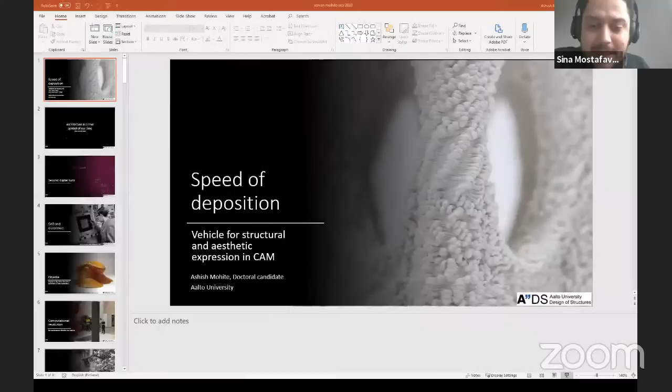Thank you for inviting me for this talk. I'm sorry, I'm having some trouble here. You guys hear me? Yes. Okay, so I'll start with my talk.

This is a few years of my work from my PhD. I'm almost finished with my PhD, I have to submit my thesis now. So the topic of my PhD is about speed of deposition, a vehicle for structural and aesthetic expression in CAM.

This presentation is divided into two parts. The first part is about the theoretical background, what I'm trying to do. And the second part is actually the practical examples, the experiments which I did.

Architecture is a true symbol of our time, architecture has a very close relationship with technology. But as you know, in the second digital turn, Mario Carpo argues that architecture is always lagging behind the technology. And now when we started the first introduction of CAD in architecture, there was this disconnect between what we do, like the maker, and what the building is built, because we are designing it on a screen, and actually the building is built by the drawings.

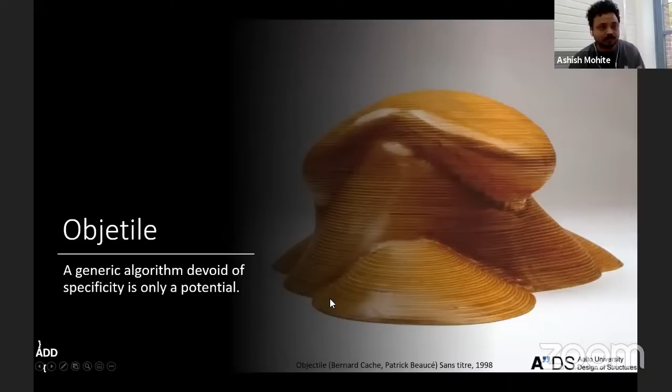And then in the early 90s, when the experiment started in computer aided manufacturing, there was this experimentation which was Objetile, where the generic algorithm was devoid of the specificity, but it had the potential. And this is where all the thinking started, how digital fabrication can be used as a process in the design, and how it would influence the way we build.

And now we are having this computational revolution where, as you know, there's no gap between the thinking and making. So the thinker is also the maker. And then we can dive into the topic of digital craft again. We are now this kind of digital designers and makers.

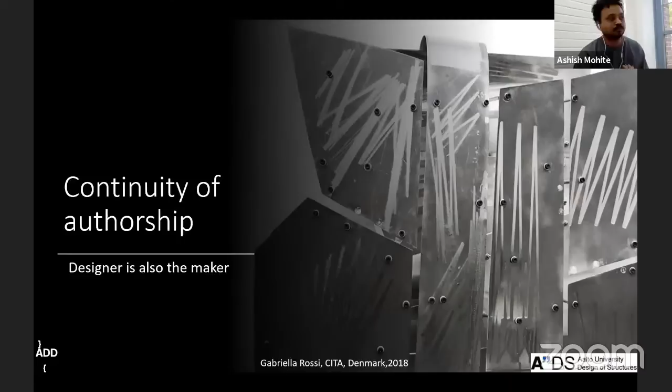This gap is narrowing. As you know, architecture was always - we were making drawings always, we are not actually building. But now with digital fabrication, we can actually also build and create this kind of notations, which are the code. And in order to have this kind of digital craftsmanship in architecture, what I believe we need is two things - one is this kind of continuity of the authorship.

So the designer is also the maker, and the object itself is a process model. What I believe strongly and like to argue is that we are no longer designing the form that will be ultimately produced, but we are designing the process. I'm interested in this process of making with the digital fabrication tool, and what comes out of the process because of the material, because of the tacit knowledge.

But then there also lies a risk of control. There is this risky craft of digital making, which Branko Kolarevic also quite rightly said is inseparable from the notions of glitch, errors, and unexpected results. So you have to be very careful about what kind of control you want and what kind of lack of control you want. This leads to the surface variations I'm interested in, what I call this rebirth of ornament, which comes from the process and from the materiality.

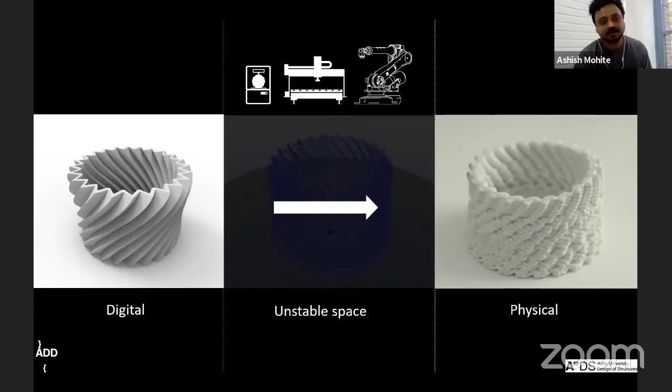So all the experiments started from one accident I had back in 2014. There was this digital model, I built this ceramic printer, and then I printed that digital model, and the result was completely different than the digital model. I was interested in what actually happened, what is this unstable space in between the making and the material which produced this form, which I never designed. So this form actually came from the process.

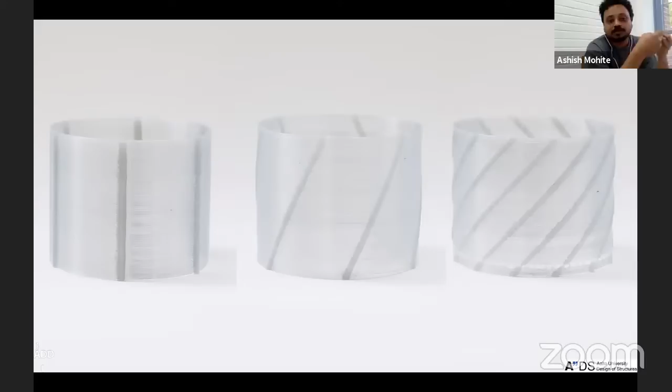So I started experimenting. First I started 3D printing with plastic, and the only parameter I changed is the speed. For all the examples I'm going to show, mostly cylinders, and all I change in the code is how the printer moves. When the printer slows down, it deposits more material; when it moves faster, it deposits less material. And I try to observe what kind of surface artifacts are created from that.

As you can see, the surface artifacts start to happen from the process of the printer moving. All of this is not designed, it comes from the process. Then I start changing the parameters more, changing certain rotations, changing the speed more and testing more. Again, the original objects are just cylinders, and all I change is the speed at which the printer moves and the amount of material deposited at certain points. Just from the movement of the printer and the material, in this case plastic, you start getting these surface artifacts which are undesignable, coming out of the process, these textures which are coming out of the process.

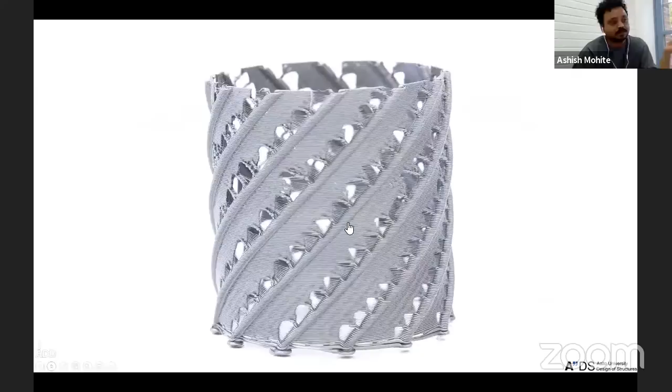When I wanted to make some holes, I again started changing those parameters, and because of stringing in plastic, I started getting this kind of holes. So again, remember it's always just a cylinder form, and I'm changing the speed at which the printer moves.

Then I moved to another material. I wanted to see how the material has an effect on the output. These are the same kind of results from a different material. In the first case it was plastic, and in this case it was ceramic. As you can see, ceramic, because of the viscosity of the material, the ductility of the material, and the effect of gravity on the material, gives different results than plastic.

And I start comparing those results now. Here, side by side, is the same kind of code for plastic, and the same kind of code for ceramic. You can already see what different results I'm getting out of that.

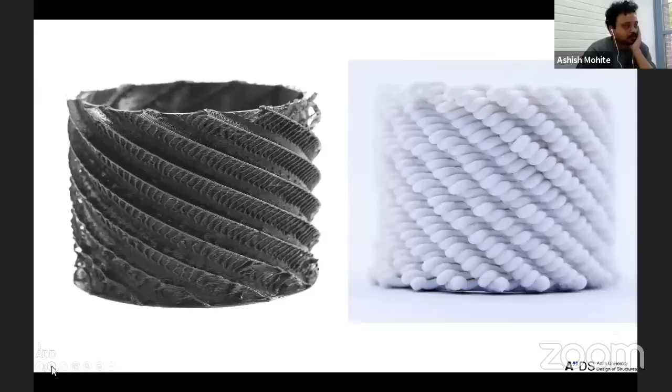So then what kind of architectural implications this brings was always the question in the background. I started also experimenting with metal welding, 3D printing by welding robot, and I did the same experiments again. Now I'm comparing three materials, how the materiality actually affects the object. Here, again, I'm just designing the process, and trying to see how the materiality and the movement of the printer actually affect the outcome.

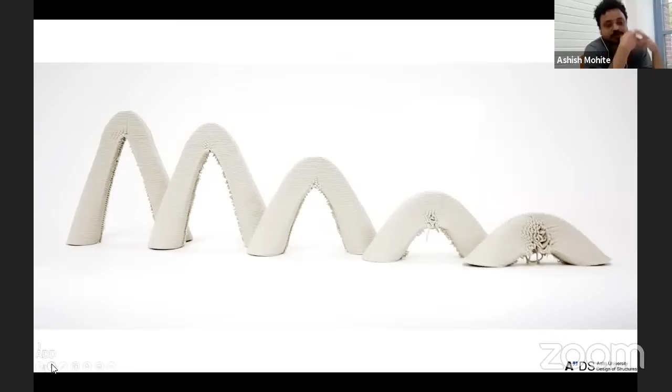Now, in order to check what would be the architectural implication and the mention of ornament I mentioned before, I did a series of arches and checked where the arch actually starts to fail.

I wanted to apply my effects of the speed of deposition to that and see what comes out of it. This is the first experiment, without my effects, where you can see the arch failing.

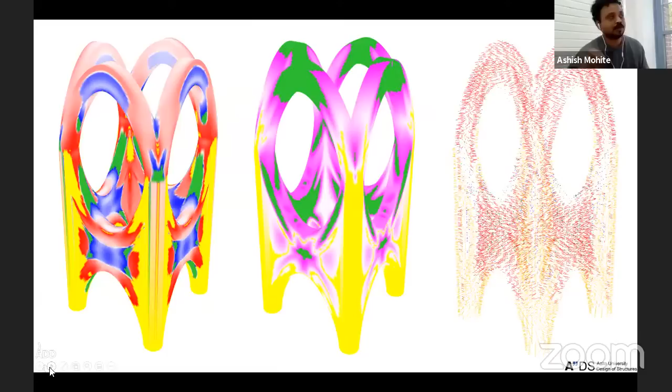I did a Karamba structural analysis, which told me where I should add more material - meaning where to slow the printer down and where to make it move faster. This was the result: next to each other, this is the model without the effect, and this is the model with the effect of speed of deposition.

In this case, the speed of deposition textural effects start to become ornamental. Why ornamental? Because if you remove the ornament, the object fails. This gets at the notion found in Gothic architecture, where ornament is actually structural - without the ornament, the structure fails.

This was another experiment where the structure is failing - the arches are moving in one direction. Because of this deposition of material, the arches become stable.

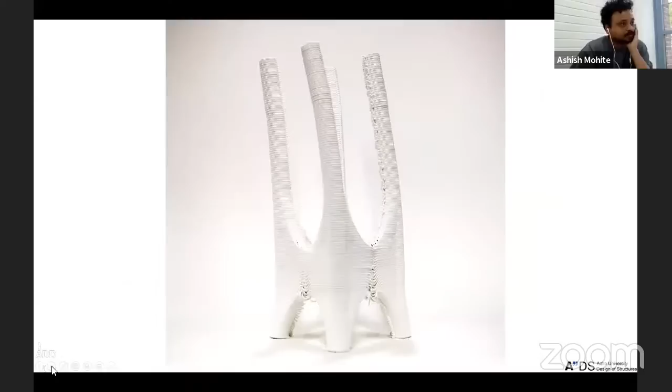Another experiment involved four tall columns, which were also moving in one direction because of the load. With the speed of deposition applied, they become stable.

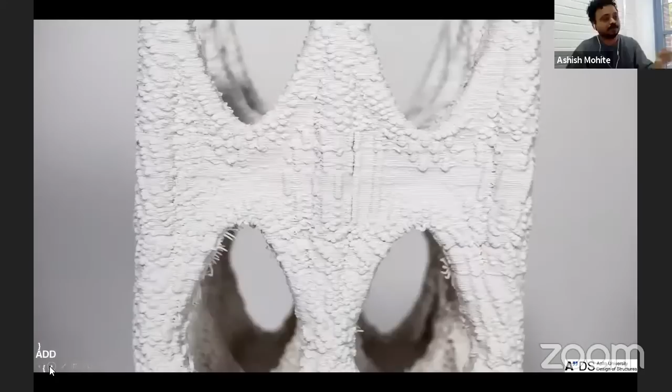Then I wanted to scale it up and make a large scale prototype. As you can see at the bottom, there's more mass and more material because that's where more mass is needed. As you move up, the speed goes faster, meaning the printer deposits less material, and you can print a stable structure.

So the next question is how do you scale this up to architecture? I remember from Neil's lecture, he had this King Kong example where it's not that easy to scale a small prototype into a real architectural-scale prototype.

That's when I also started this concrete 3D printing company, Hyperion Robotics. Now the idea is that once my PhD is over, I'll take these experiments to the larger scale of architecture, and try to apply what I learned from the speed of deposition to see what kind of surface texture and ornamental implications it has.

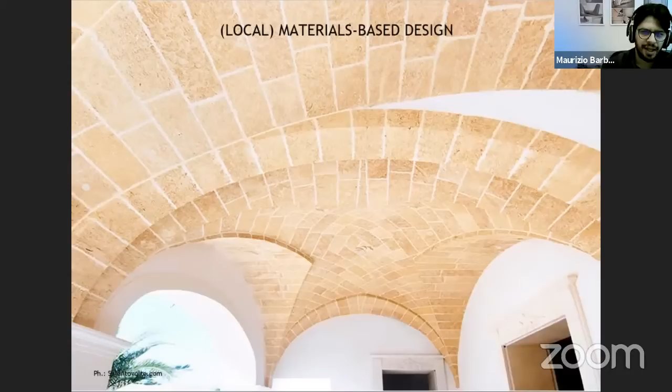This is important in order to preserve and evolve the history of local identities. I like to start from history when I design something. This is particularly true for stone architecture because it has centuries of history behind it and a huge heritage that constitutes some of the best architectural examples of the past, obviously where the stone is available.

For example, this is a volta stellata, which is a starred vault - that's the translation from Italian to English. It is a typical vaulted system from the south of Puglia, built in situ with few supports and without the use of a falsework.

I'll stop talking about Puglia because I want to talk about the evolution of fabrication techniques from tradition to robotic. For sure, stone is an ancient material, but its use has evolved over the centuries to embrace the digital revolution, and in the last few years, the use of robots as well.

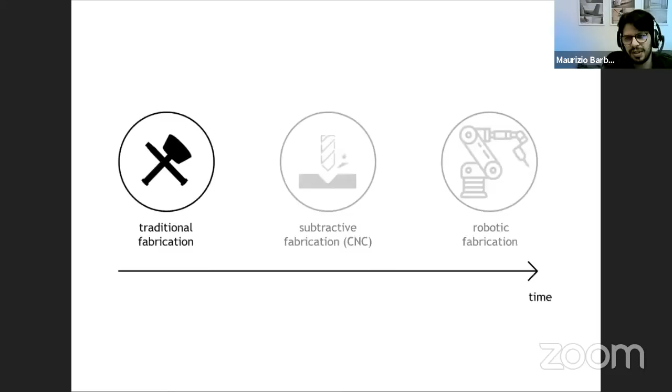The first phase of this evolution is the traditional era, which has lasted several centuries, as you know. Among all the traditional construction techniques using stone, there is one which is particularly interesting for us: stereotomy. It's a strange word, but stereotomy comes from the Greek and indicates the art of cutting solids, and it is historically related both to timber and mostly to stone.

Stereotomy is particularly useful when the complexity of the geometry to be constructed needs very well-controlled design of the constituent parts of the vaults, starting from the design phase. So it's not only a design tool, but a way of starting to imagine a new type of architecture.

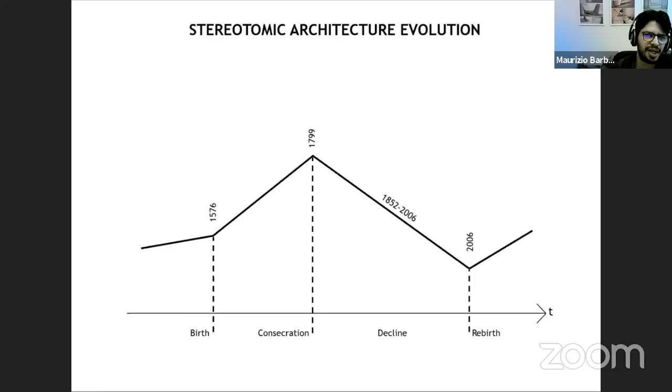And despite its utility in creating such amazing vaulted spaces, from the second half of the 19th century we see the progressive disappearance of the art of stereotomy from the architectural scene. This happened mainly due to the introduction of artificial materials and the consequent development of construction techniques and design methodologies appropriate to their use.

But the event that changed the recent history of design is the so-called digital turn, which gave the ideal condition to overcome the modern versus postmodern contraposition. The massive diffusion of computers for design completely changed the reference paradigms of the discipline, finally allowing for the development of new architectural languages deriving from new design methods.

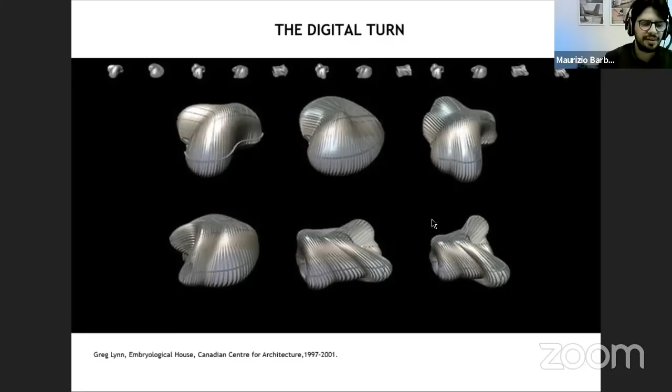I think it is also important to update some old techniques like stereotomy. Of course, the realization of this new architecture is allowed by digital fabrication. Starting from the 2000s, architects understood that the information in the digital 3D model could be used directly for manufacturing and construction purposes, thanks to the use of CNC machines and other tools.

Anyway, the introduction of digital technology in the stone industry is therefore the result of a long evolutionary process rather than a real revolution, unlike in other sectors of architecture and fabrication. This has allowed us to maintain a series of technical and practical know-how deriving from a long secular tradition, which then merged with the innovation brought by digital technology.

As an architect and designer, I started to think about how to take advantage of these tools and find a way to express their potential to update the stone sector.

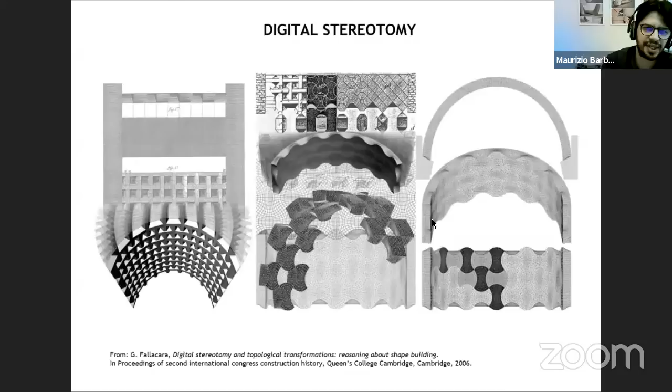In the same period, the introduction of digital technologies led to the development of digital stereotomy, which is the main sector in which I worked, and which is an update of the discipline made possible by the spread of parametric modeling and CAD/CAM fabrication systems. Today, in the scientific literature, the term stereotomy is used in a broader sense because it has partly lost its traditional association with stone architecture, approaching the literal definition - the science of cutting solids - without any reference to a specific material. This is what I've called, with my supervisor Giuseppe Fallacara, Stereotomy 2.0.

With him, I've co-edited an entire volume of the Nexus Network Journal about stereotomy 2.0, which included an unfinished manifesto, just to stimulate the discussion on this topic.

In this text, we stated that stereotomy 2.0 is closely related to the use of digital design and manufacturing tools like robotic arms. We also stated that in stereotomy 2.0, we should investigate the unexpressed possibilities of the discipline and overcome the limitations imposed by individual materials, like using just stone without the aid of other materials, for example by using composite materials born from the union of materials with different characteristics.

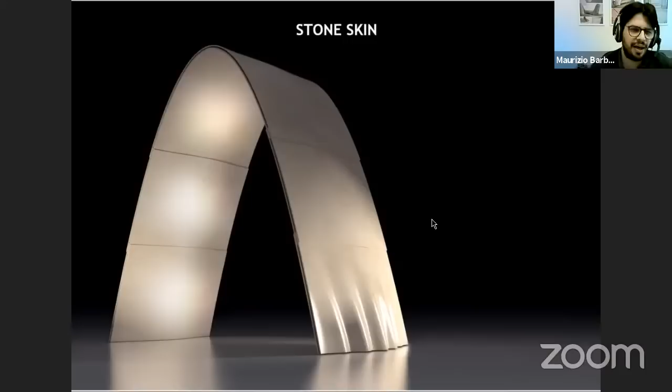I'm very lucky in the last years to collaborate with companies and other designers in the realization of several prototypes and research projects in different fields such as architecture, digital crafting, and industrial design. For example, in the field of industrial design, I've supported my research group and the company Generelli SA, which is a Swiss company specialized in complex stone, marble, and granite processing, and in the design and realization of experimental projects in order to show the new possibilities offered by the use of robotic tools and also marble or stone or granite reinforced with carbon fibers.

Obviously the carbon fiber is used to absorb tension stresses, and in this way we can make the stone thinner and lighter. This is just an example of what this relatively new field of digital stereotomy, stereotomy 2.0, and new stone use is about.

And the fabrication process, in this case, is based on the freedom permitted by robotic fabrication and employs vacuum bagging to join carbon fiber layers to thin marble, granite, or stone.

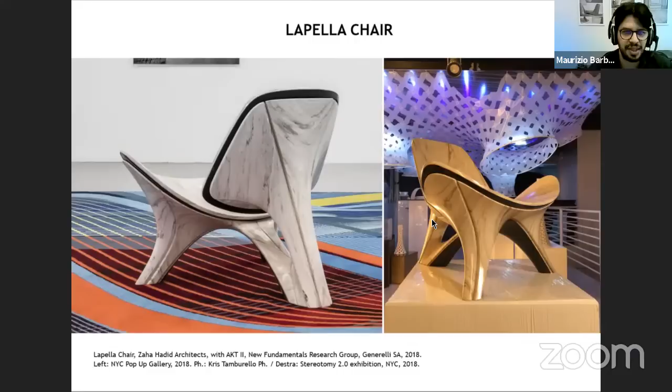The most notable example of this research is the Lapella chair, which has been designed by Zaha Hadid with the support of AKT II, our research group, and realized by Generelli. Due to the free-form shape of the chair, we carved the constituent parts from several small solid blocks, as you can see in these images.

And this is just a picture of the Lapella team in New York. Here you can see the results of this small experiment.

Moving from that, also in the field of industrial design, another project I worked on is the Coral Table, that has been exhibited at Marmomac Verona, which is a big stone fair in Italy, in September 2019. It was designed by Dustin White with my support.

For this exhibition, which was based on the naturality of stone, to highlight the natural aspect of stone and marble, we proposed a large format table design featuring a continuous woven minimal surface geometry, as you can see here, to be fabricated in Palisandro marble.

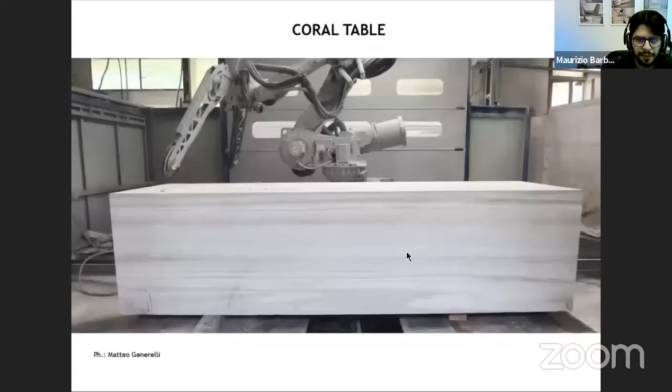The shape is inspired by natural phenomena like erosion of the rocks and coral reef growth patterns. We started from a single solid block of Palisandro marble, 3 by 1 meters.

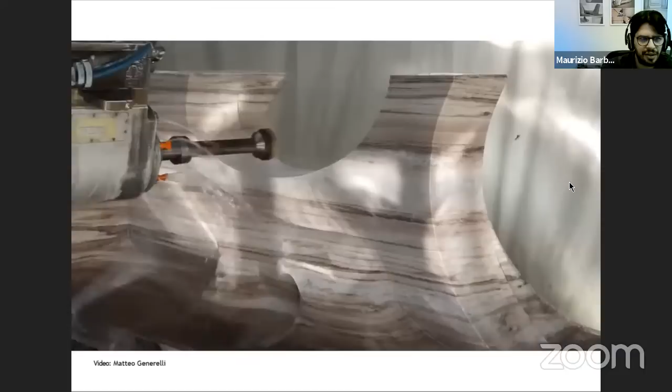Using robotic tools, we cut away some parts of the block by using wire cutting. After that phase, the robotic arm milled away the marble layer by layer, as you can see in this video.

It was a long process, like a digital sculpture, we can say. Final polishing has been done by hand by highly skilled artisans. However, most of the fabrication process has been done by using a robotic arm, as you have seen.

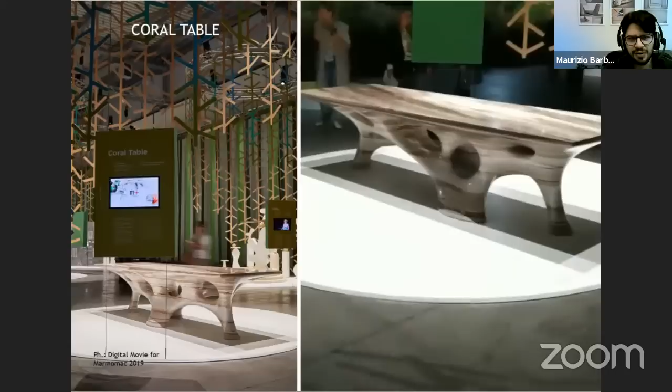This quick video was taken during the exhibition in Verona. I'm excited to show the table because it is a perfect example of blending between robotic and artisanal skills, which is a key aspect of the evolution in stone design and fabrication.

The last project that I want to show is Flux Vault, which is a vaulted pavilion designed in collaboration with Giuseppe Fallacara and the French company SMBR. So we are moving from industrial design to architecture, or small scale architecture.

The pavilion has been the representative stand of the SMBR company during Rocalia in 2017 and 2019. We presented it 2 times. Rocalia is the French fair dedicated to natural stone, and it is held in Lyon every 2 years.

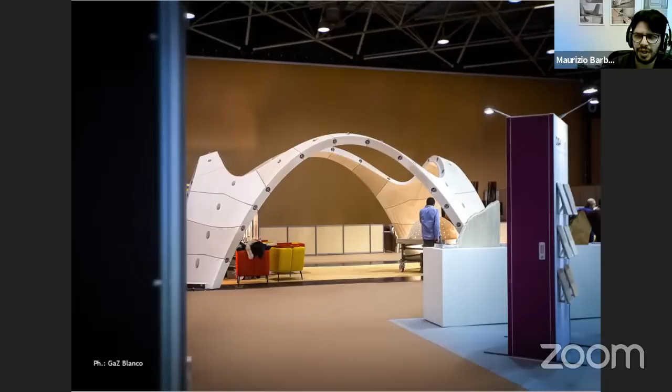Flux Vault covers an area of 36 square meters and has a maximum height of about 3 meters and 20 centimeters. The shape of the structure derives from a base surface formed by a network of catenary curves in such a way to make the vault subjected almost only to compressive stresses.

The key aspect is that the structure is designed to be mounted with the help of very limited support, to avoid the use of timber centering. Also for this reason, each block is designed to weigh less than 500 kilograms, to facilitate assembly and to be produced by using robotic fabrication.

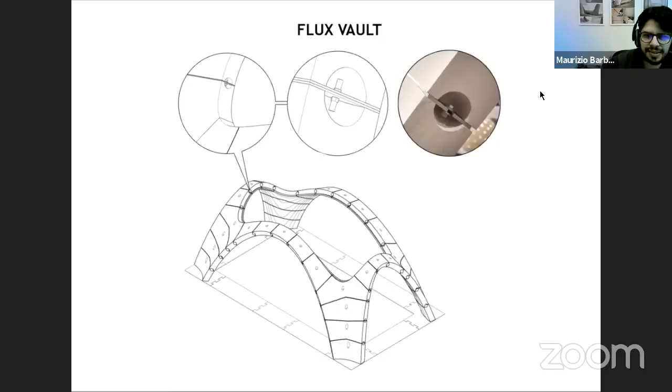Each contact face among the various voussoirs presents a metal fixing system, which you can see here. This system is a bolted fastening system placed on plates at the outer edge of each block.

Due to the complexity of the stone blocks to be produced, robotic fabrication is the most appropriate technique to use in this case. Wire cutting has been used to cut the contact faces between the blocks, which are completely flat, while milling has been used for carving the overall shape of the blocks and the sculptural relief.

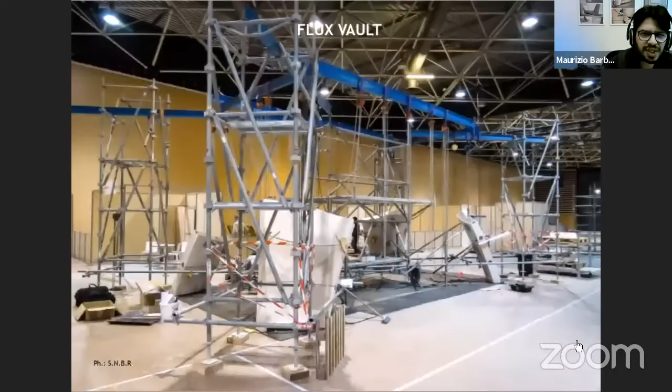The precision allowed by robotic fabrication is a key aspect of this project, also for its construction, because the details we designed have permitted us to assemble and disassemble the structure in just 2 working days without producing waste in scaffolding. Each voussoir was lifted from above and temporarily attached to a metal frame placed above the structure, and each stone was positioned, placed and mechanically fixed to the subsequent ones until the keystone was placed in position.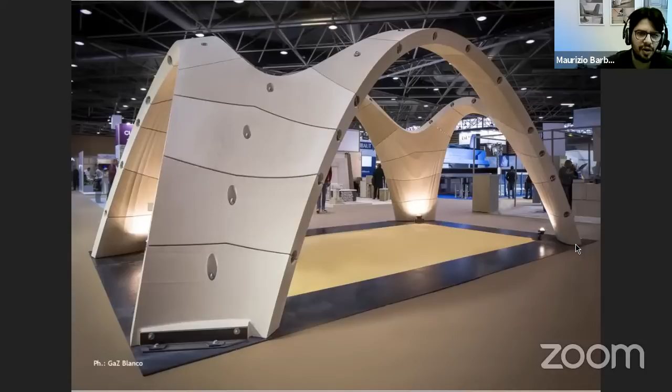The sculptural relief of the interlocks remembers the flow of internal forces of the structure that proceed from the arch to the ground seamlessly. On one hand, their presence intends to enhance the technical capacity of the latest generation of CNC machining, and on the other hand, they represent a possible way to revamp the sculptural tradition that has always characterized stone architecture, obviously updated in a contemporary way.

These are some pictures of the finished pavilion and some detail pictures, you can notice the very high precision of robotic manufacturing and the details of the metallic connection between blocks.

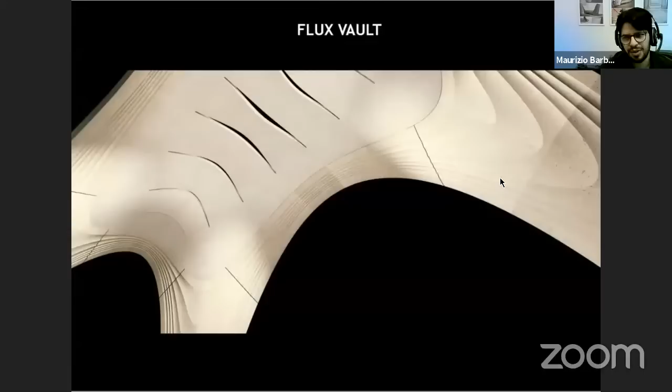These are some pictures taken during Rocalia in Lyon. In the initial project, we designed a cap, you can see here in this rendering, to be made of micro concrete by using an additive manufacturing process. However, for budget and time reasons, the top of the vault has not been realized yet. And this is the view.

Another option to evolve this research, in an interesting way, would be to continue to build the cap by following the contour lines of the structure, as you can see in this picture. But it's a way not investigated yet.

The last interesting fact to note is that this pavilion is maybe the first example of a reversible and remountable stone vault ever made, because we have used this stand for several fairs, and I think it's an interesting fact for a stone vault.

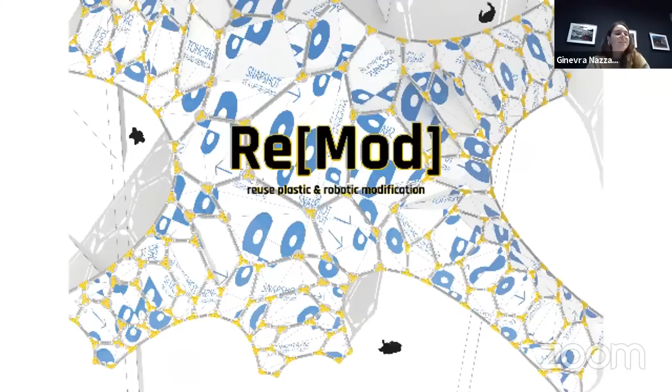Good afternoon. My research project is called ReMod, which stands for Reuse Plastic and Robotic Modification. Reuse plastic because everybody knows that plastics, because they're widely used, are now fundamental for the global world economy, but they're also one of the biggest environmental issues nowadays.

That's why it became really necessary to start to recycle or reuse plastic products. At the same time, we're in the middle of the fourth technology advancement, so the question is not anymore if robotic production will be used in the building process, but how it will be used. This brings me to my problem statement: how can computational design and robotic production help to reuse plastic in architecture?

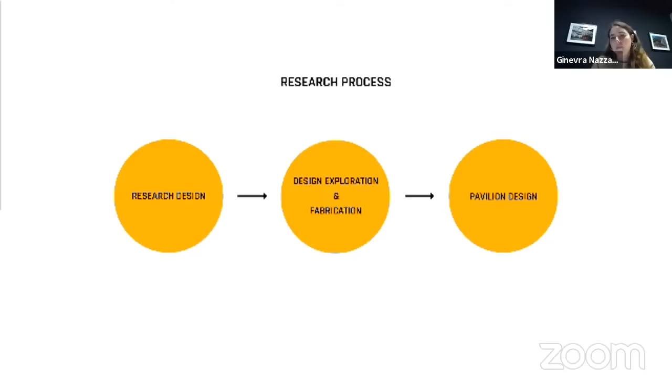To answer this question, the research process was divided into 3 parts. The first part was about the research design. The second part was mainly about the fabrication. And the third part was the design of the pavilion itself, which is the final product of the research.

Starting from the research design, the starting point of the research was to look for a plastic object that could be used for the design of the pavilion. So many plastic objects were selected and tested.

At the end, the selected object is the one you can see in the image, which is a hollow and openable plastic object usually used to store and transport drilling heads, but when it reaches the destination is just thrown away. So it will be destined to the landfill.

Starting from that object, the main design concept is to take advantage of the flat base of the component in order to create junction elements based on the repetition of the component. In the image you see a 6-component junction, which is way too much, but that's the general concept.

But at the same time, to still allow freedom and complexity in the design, a computational system was developed, based of course on different steps.

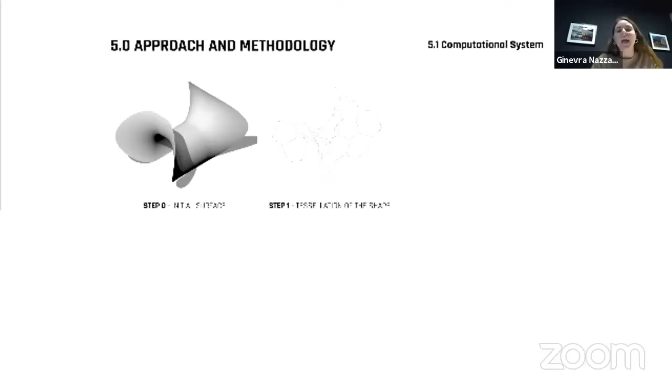The first step, step 0, is the initial surface, which is the shape of the pavilion and can be whatever surface. Then this surface will be tessellated, usually in hexagons and pentagons. And at the vertex of the tessellation, the joints based on these recycled, reused plastic elements are placed.

And consequently, a ribbon structure is also created, which is also based on reused plastic PVC pipes. The last step is covering the pavilion with some textile that is also reused.

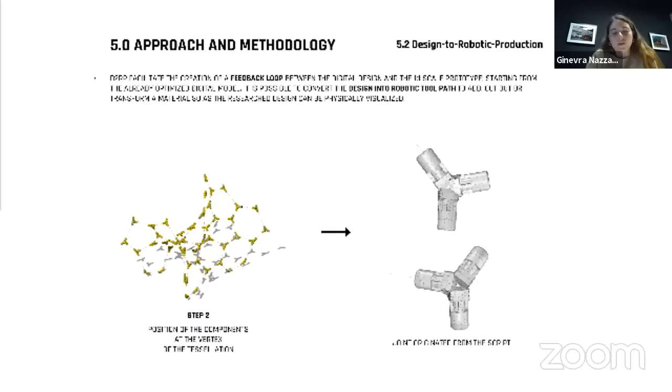Going into the fabrication process, it started from the extraction of this joint from the computational system. The advantage of using a robot is that every joint is different from the other, so it was easier to create a robotic toolpath than doing it manually.

The fabrication process was based on the idea of taking one component and removing a part on one side, and on the other side, the plastic itself of the component was folded and used as a connection material, in order to not use any other material and not create waste.

The fabrication process is based on 4 steps. The first step is the cutting of the component with the robot. The second step is the folding of the plastic with a heat gun. The third step is the gluing of the washer, and the fourth is the connection of the parts to each other.

Now there is a video regarding the simulation. I hope you can see it. This is the simulation of the robotic toolpath.

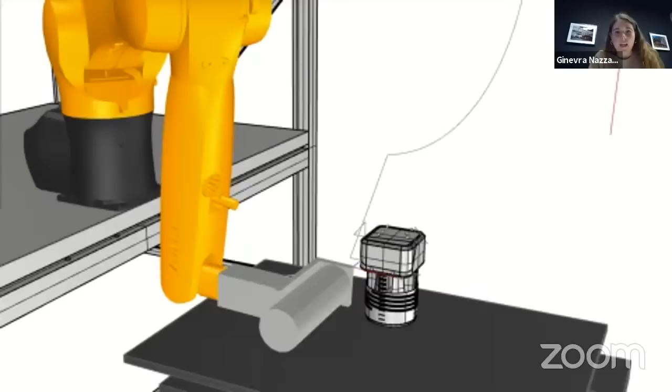You can see how the robot is cutting the component, and this is the actual process. Here you can see that the robot is first drilling the holes in the component that will be used for the connection of the components to each other, and then is removing the material which is not needed.

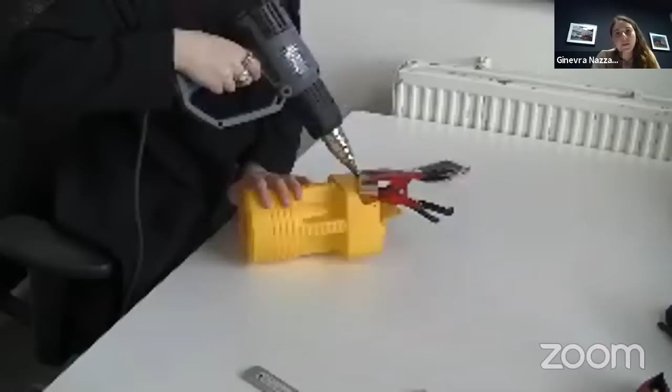This is the last step of the fabrication process. You can see that the parts used as a connection between the components are folded with a heat gun. Of course, they are folded at the right angle so that they fit perfectly into each other.

So now you see that the component fits perfectly into each other.

This is the final prototype next to the 3D model. It was also structurally tested in order to understand the strength of the prototype itself.

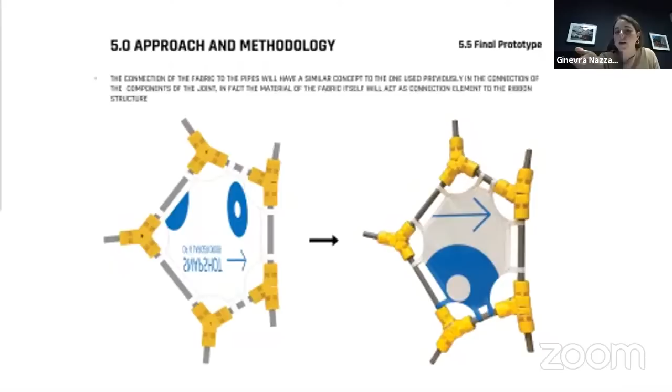This is the final prototype, which is a portion of the final pavilion, and is based on the repetition of 5 plastic joints, which are connected with reused PVC pipes, and it's covered with a reused textile.

For the last step, that is the pavilion design. This is the final result, which I hope you can see. This is the pavilion that is based on the repetition of these hexagons and pentagons.

This is the pavilion in the location, and you can see the joints based on the reused plastic object.

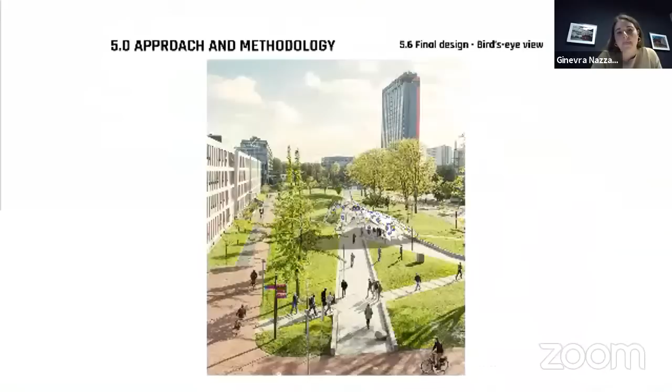This is the pavilion placed in the location, that is the TU Delft campus.

To conclude, this is an approach on how the robotic assembly could be implemented in order to reduce the manual input, because there was a lot of manual input since the components were connected to each other manually with a rivet gun, but the whole process could be automated to reduce the manual input.

In the original configuration, the object was fixed and the robot was moving around it, but a hypothetical improvement could be that the robot is equipped with a gripper and moves the object in front of the milling tools in order to implement the whole process. Then the same robot equipped with a gripper can move the component in front of a heat gun.

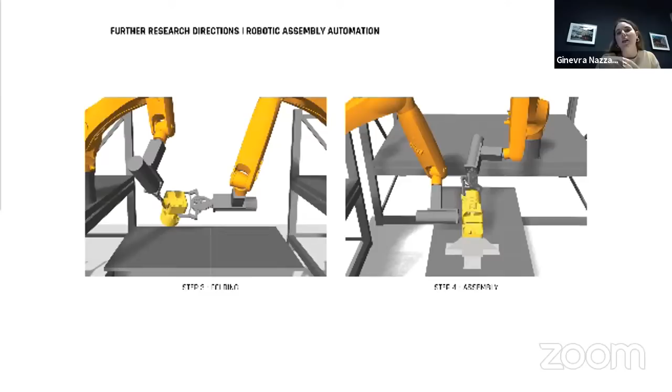And the last two steps could be implemented in a multi-robot setup with two robots. One robot is equipped with a gripper and the other robot is folding the plastic. The last step is the assembly, where one robot is holding the component and the other robot is bolting the components together. Yeah, thank you.

Thank you very much, Ginevra. Interesting to see how robotic fabrication can extend the material palette, and also how we can question existing architectural education paradigms.

So to move on, we go to the first presentation by Giulio Brugnaro. Giulio is a trained architect, designer, and researcher working in the field of Industry 4.0, robotic fabrication, and applied machine learning for design to robotic production workflows. He has been a Marie Curie fellow researcher and PhD candidate at UCL Bartlett. He founded the InnoChain Research Network program. Giulio holds a bachelor degree from University of Venice and a Master of Science from the iTech program at University of Stuttgart. He has also been a teaching fellow of the MArch Design for Manufacture program at UCL. Giulio, you may start.

Yeah, okay. Can you hear me now? Okay, yeah, all right. Hey, thank you so much for giving me the opportunity to present my work. I'm really excited.

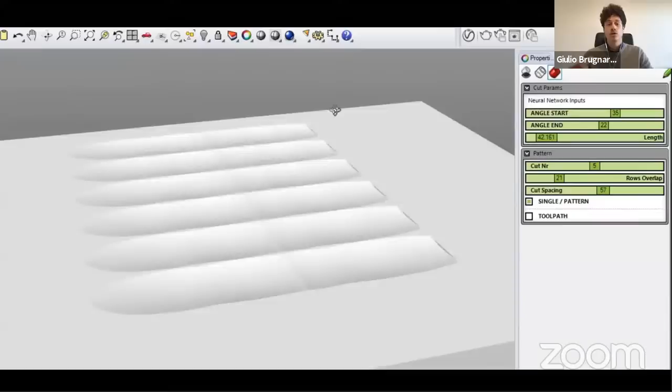in the development of material interfaces that would enable designers to engage with the affordances of production processes. So to address this issue, three main opportunities have been identified from the fields of manufacturing and computational sciences. Firstly, the recording of a skilled human expert to extract their tacit knowledge and use it to model a wide variety of robotic fabrication tasks.

Secondly, the adoption of machine learning models to synthesize knowledge from large fabrication datasets collected through sensor devices to support decision-making in the field of manufacturing. And thirdly, from design workflow of metal components, the evaluation of design instances through automated manufacturability feedback supported by a simulation framework and a knowledge base.

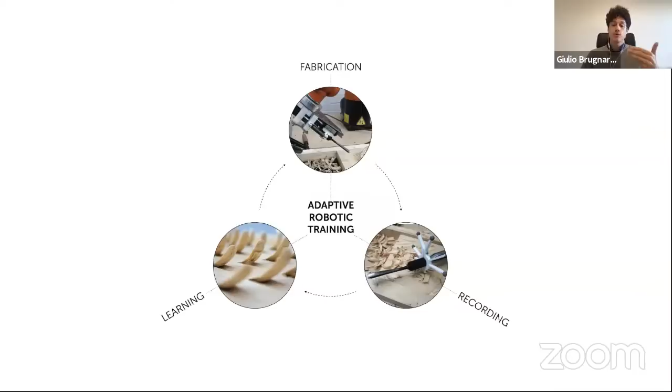Based on the literature review findings, the investigation has been organized around a technology-led and a design-led component with their two different respective methodologies. The technology-led component focused on testing the nature of the material variance of timber and the extent to which it's possible to predict its influence on the geometrical outcome of robotic carving operations. The design-led component, on the other hand, addresses the integration of the development methods in the workflow of design firms and its implication in the evaluation of design solutions.

The first stage of the training methods concerns the acquisition of real-world fabrication data and its processing into structured data sets for the training process.

The device sensing strategy for the recording of carving operations makes use of two main techniques: motion capture cameras and photogrammetric reconstruction. The system of motion capture cameras, as you can see in this video, is used to track with high degree of precision the position of reflective markers in the recording space and reconstruct in real time the fabrication tool, also in the digital design environment.

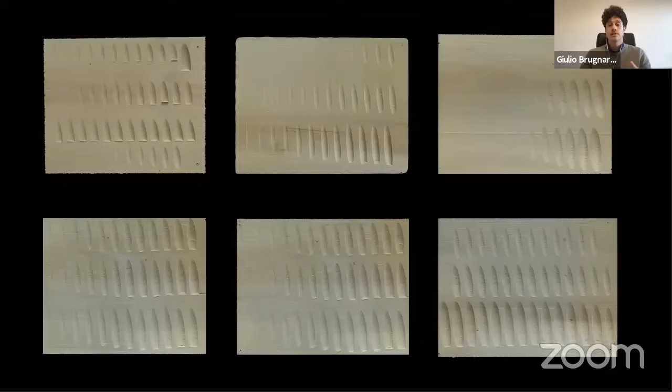After the carving session, each training board is reconstructed as a 3D mesh through photogrammetry and segmented to isolate and analyze individual operations. These techniques combined make it possible to successfully reconstruct each operation to a high level of detail necessary to measure the variance level within a range suitable for design applications.

The integration of an initial human demonstration of the task together with the data acquisition recording performed with an industrial robotic arm is particularly beneficial, as it makes possible to narrow down the mapping of the parameter space and avoid dangerous or inefficient operations.

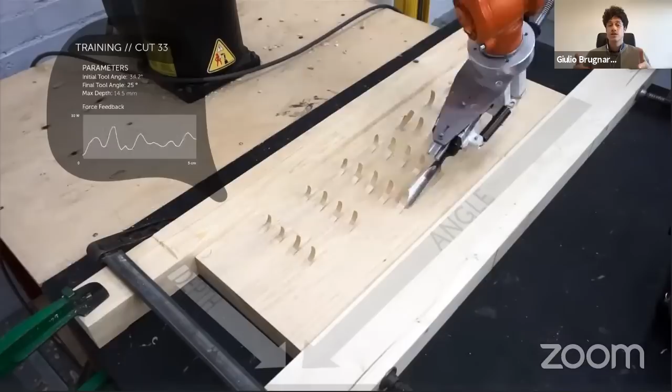The design of experiment approach, guided by the human demonstration, made it possible to efficiently structure the data acquisition, demonstrating that properties of the materials such as wood grain arrangement, density, and species basically determine a deviation between the digitally prescribed operation and its physical outcome, which results substantially above the tolerance threshold sufficient for design purposes.

The human demonstration data in black provide a safe subset of the parameter space as a starting point for the robotic exploration in gray. The initially defined boundaries are gradually extended during the robotic exploration with the aim of building a more comprehensive understanding of the fabrication task and increasing the prediction of the performance of the system, providing a larger amount of data.

As a consequence, unlike in the human dataset, the robotically generated dataset will consist of both successful operations in red and unsuccessful operations in blue, depending on specific user-defined criteria. For instance, when it's not possible to extract the tool from the wooden board, or the opposite, when the operation doesn't actually remove any material volume.

The modeling of the influence of material properties on robotic carving operation has been addressed through a series of inductive methods based on the training of supervised machine learning models aimed to identify patterns in the recorded fabrication datasets. The training workflow is organized and presented here in two main sections.

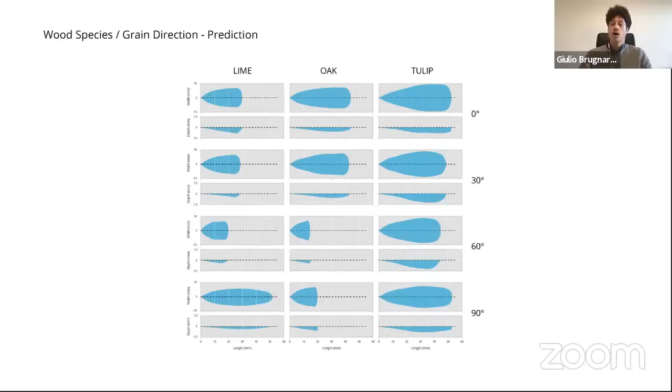The testing of the devised strategy within actual design workflows was addressed through a series of case studies performed in collaboration with industry partners in the project, ROK Architects in Zurich and BIG in Copenhagen.

Each industry collaboration unfolded into an extended catalog of robotically fabricated components and multiple digital design iterations supported by the simulation tool, which has been trained by the team of designers to fit every time the specific scope of the design brief.

The devised workflow entailed a sequence of what-if analyses evaluating the influence of geometric pattern variation, wood species, density, grain direction, carving tools, and specific fabrication parameters, which substantially affect the resulting geometric features of carving operations.

The design outcomes have every time been reached only following a multi-step design process, where the designer has been asked to make critical decisions based on a material and fabrication simulation provided by the trained system, unlocking this way a range of design solutions which would be otherwise unavailable in a purely digital environment.

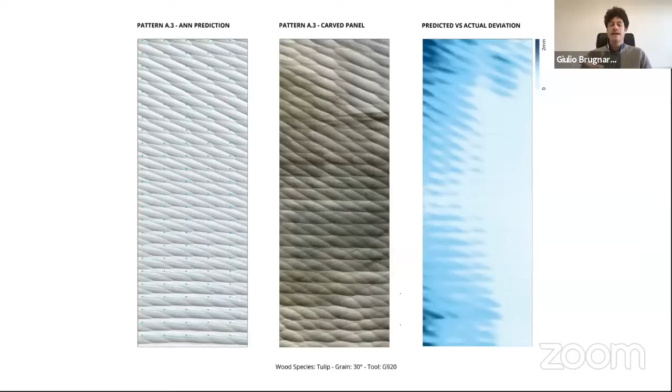So the final stage of the exploration is the robotic fabrication of a series of carved panels, which results from the sequence of what-if scenarios examined by the design team. For validation purposes, each fabricated panel is digitally reconstructed through photogrammetry, as we've seen before, and compared to the predicted geometry through the analysis of the deviation between the two, which is visualized here as a gradient color mapping.

So the main contribution of the research is to the field of robotic manufacturing and digital design interfaces, as it focuses on utilizing sensor data to train material-sensitive fabrication systems and integrating them as part of design workflows.

So although the research strategically focused on a specific application, such as robotic carving with timber, the developed methods have here the potential to be applied to a broader variety of non-trivial robotic manufacturing tasks requiring high-level understanding of the process and the affordances involved. Part of the novelty of the approach proposed in this research lies

in transposing established methods from the field of optimizing robotic manufacturing from the industrial manufacturing sector into the workflow of creative practices, to augment and support the ability of designers and to provide feedback information to guide the design process.

So the successful development of a series of methods to collect, process, and encapsulate manufacturing knowledge, and its application within a design environment, fundamentally demonstrates that the benefits of interacting at an early stage with the fabrication tools and material behaviors make better informed design decisions, and enable this way the exploration of a novel range of design opportunities and solutions which would be otherwise unavailable.

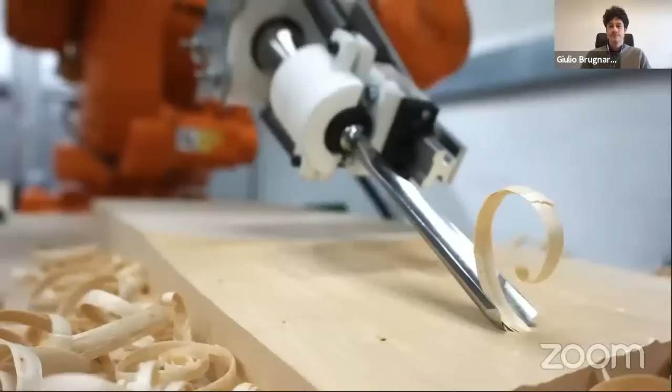Thank you very much, Giulio. Really interesting. It shows how integrated computational design and robotic fabrication techniques basically open up new doors for material computation. We're gonna come back to this later.

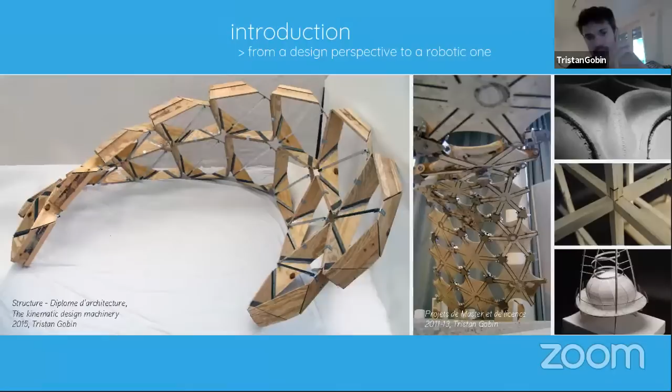So, well, the first thing is I start from a design perspective as a trained architect, but then I moved during the PhD, and also because I started HAL Robotics with three other guys, Thibault, Sebastian, and Remy, and I started looking into the robotic aspect of things, not from the design. So in five years, I kind of lose, not the interest, but I'm becoming more away from the design, and I'm more on the side of developing tools for designers actually.

So what you are looking at is well, the diploma. So it's like five years ago, and it was about how we can use robots to operate on site to construct structures. And actually it led to a question that was, can we reach on-site robotics operation? Is it possible? Can we do it? And to do it, what is necessary to develop?

So my presentation will be separated into three categories, and I will try to summarize through case studies the three main approaches that we have in robotics, and actually we need all those three approaches to maybe achieve some day robotics operation on site.

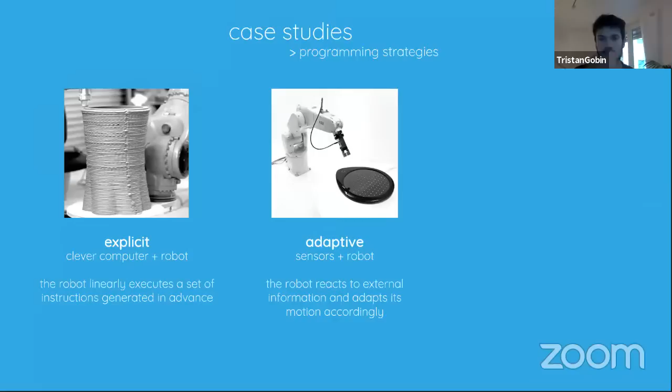Then you have adaptive sensing. We had an example before—one of the main uses of robots is to have sensors to adapt the explicit programming to specific variations, which you can use to avoid collisions, avoid burning materials, and things like that.

And then you have the collaborative aspects, where skilled humans start to interact with robots through sensors, creating a global system. We need that to have operation on site, and I'll go into detail on that later.

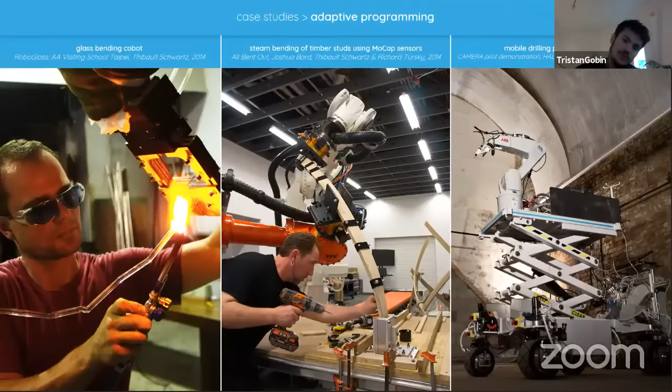I'll talk about several case studies, but to summarize one of the main ones: we work with different entities—we had the opportunity to work with CETA, Laboratoire Navier, XtreeE also for 3D printing. I think some of you know some of these projects, so I won't go into too much detail.

The approach here is to show the development we've reached so far, and I'd like to go into detail on what this development means at the program level. What we're trying to do is link what designers have as tools—Rhino, everything used to design on computers—to the real actions that robots will perform. For that, you need a whole environment to link everything together.

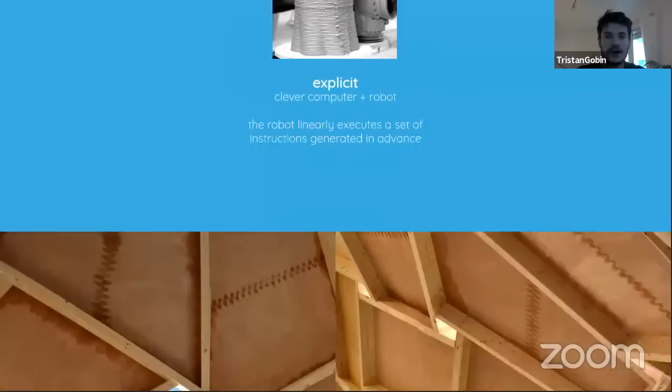When we started explicit programming, I had the opportunity with the Ponts et Chaussées to try fabrication on wood. The main reason we started this was a two-step project. We're at the second step, but I'll show you the first: how can we work on fabrication and use a robotic cell to fabricate things and then assemble them. I won't go into full detail since I don't have much time, but here's a summary of the teams on this project.

We worked with Simonin, Ponts et Chaussées, Würth for the screws and fasteners, ABB for the robot, and Schunk for the gripping system. We built this structure—a vault basically—and tried to achieve a quite complex structure, but the key was we tried to avoid complexity at the nodes, and that was the starting point of this study.

We tried to avoid complexity at the nodes, so we worked on a structure where each beam connects at its end to just one other beam, avoiding too much connection order. So the detail itself is not that complicated.

The problem then comes from adapting the geometry, because it was a curved surface geometry. To allow that, we had to embed in the beam all the complexity that came from the surface. So we ended up with a specific workflow, because we had to link the design of the geometry, details like screw position, how the beam geometry would be fabricated, and also the structural analysis.

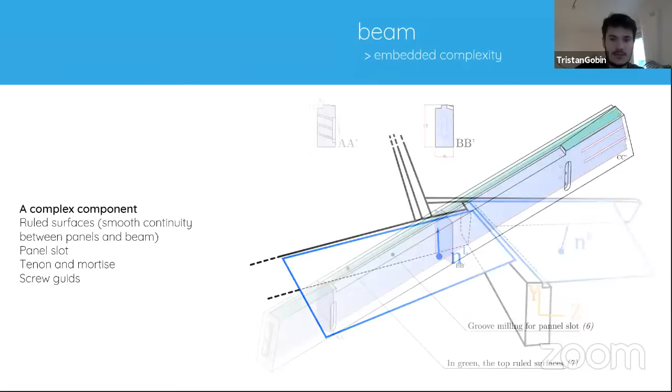So we have this workflow with these components, and actually the beam itself summarizes a lot of the complexity—in this beam component we had the screws, the tenon and mortise joints, and also the panel slots. These complexities helped achieve a certain smoothness in the surface and also made sure the screws weren't colliding with each other.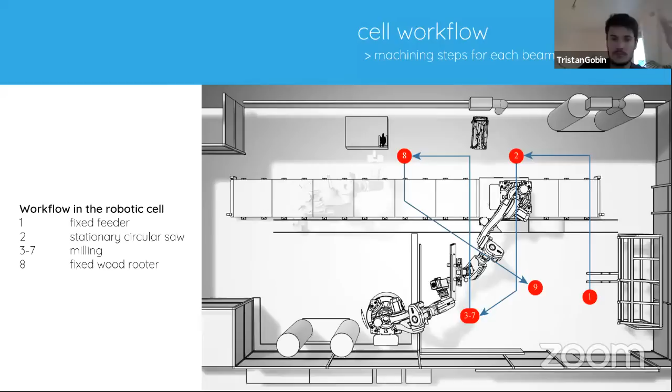It was work that embedded the fabrication constraints and the structural constraints, looping together to make sure we achieved something that actually worked with all the fabrication constraints. I'll show you an example of the cell workflow: we had two robots, one picking the beam, performing cutting and milling operations, and a drilling operation.

So you have these first steps which is the picking. It allows us to do that without any sensor, so it's really a basic way of doing things. But if you are well organized and smart enough to order the operations in the right order, then...

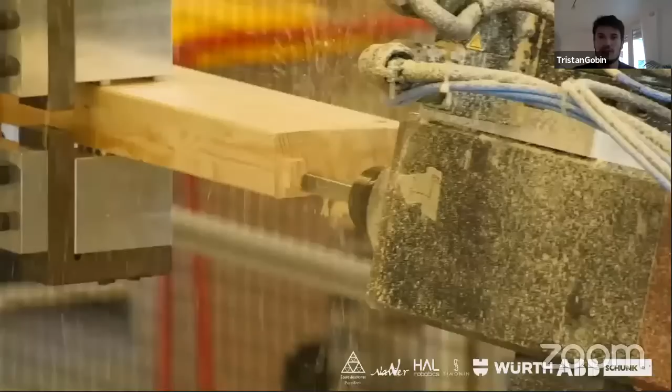...you don't sometimes need to calibrate everything. For instance, here the cutting allows us to know the precise size of the beam, and also we know the positioning in the space of the robot. We know how to interact with the beam because we already cut it in a known space, which is the space of the robot. So we have this operation, and then once everything is done...

...you have the drilling for the screw, and we actually got the opportunity with this to experiment with several tools, the static tools and the embedded tools on robots, and how we can have a global cell.

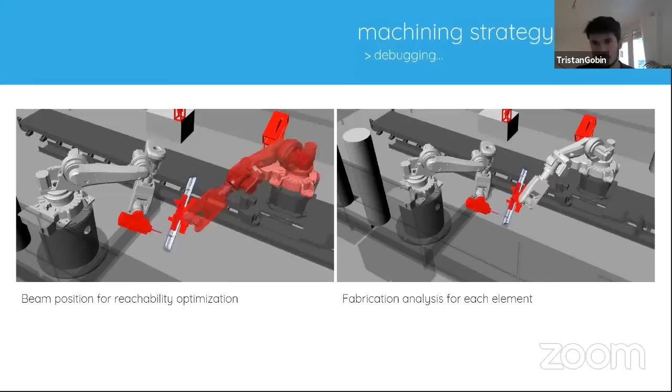The real interesting thing was that because all the beams were different, we had to optimize a lot of things. For instance, because of the size of the beam, we had to move slightly the position of the beam for one of the robots, because of its reachability. We also had to take into consideration the collision between the tools. So this was something we had to optimize.

So for instance, we had several operations to make sure for the tenon and the mortise, each time we make the mortise, there is no collision between the tool and the gripper, the milling head and the gripper, and also with the surface of the beam. So this is basically a process without having any feedback. But then here we had to optimize everything.

So that's, let's say, the first steps. By the way, the beams were also designed to be movable by one human or two, to make sure that we can build it without any problems.

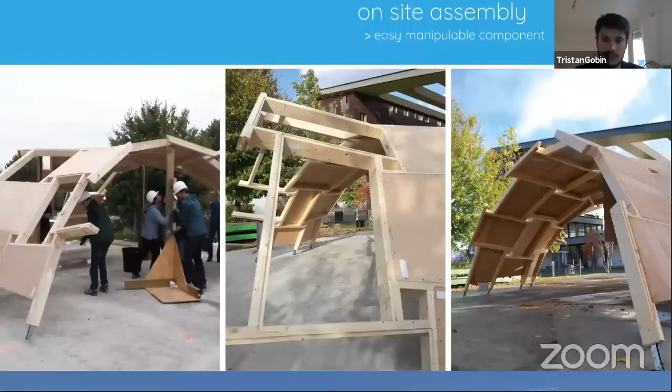So this is a nice picture, not snowing that much in Paris. Well, it's nice to see that.

Then it comes to adaptive programming. So now it's about how you can embed information that comes from sensors and evolve the programs that you explicitly write. And then you want to adapt, for instance using force sensors or laser distances, etc., the behavior of the robot.

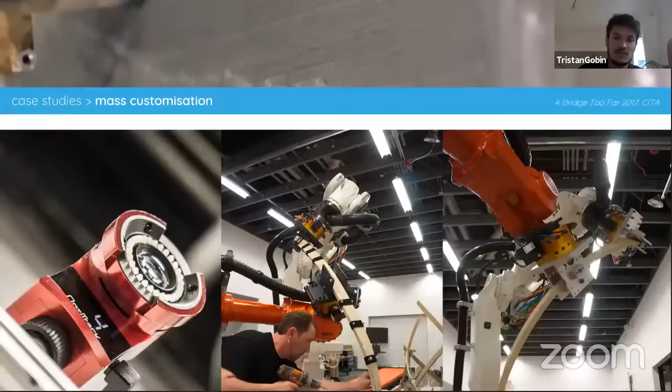There were several examples of that before, but our problem here is that we don't want just to adapt specific tools, we want a global framework that can embed every type of operation. For us, this is the same operation, something that maybe you know, it's kind of old now. Well, the thing is, for us now, this kind of operation, we try to generalize them.

For us it's kind of the same thing. We basically try to have information coming from sensors, and we have a pipeline in the framework that allows us to embed this kind of information and interact with the robots and make them act. If it's force sensors, motion capture, whatever, it's actually the same pipeline that should be used, and for us this is the most difficult part to achieve.

But then it will help us manage to put machines on site, because as you know, a construction site is quite a mess. You have a lot of actors, and you want to be sure that every machine and person interacts properly.

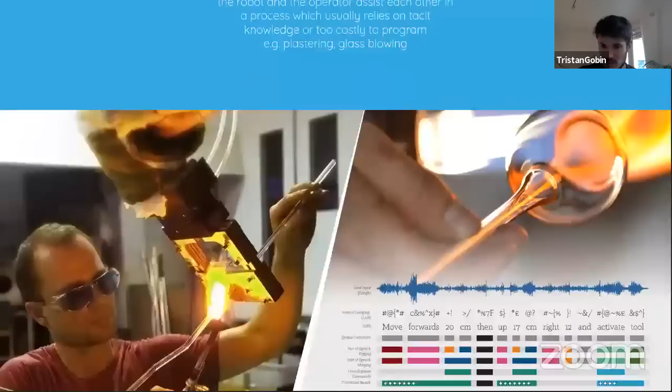Which leads me to the last part of this, which is collaborative programming, something that is the most difficult to achieve. You may have heard about cobots and stuff like that. We are at the beginning of that, obviously, and there's a lot of leads to follow to enhance this interaction. For instance, one of my partners had the opportunity to work on how you can control robots by speaking to them, which I think is an interesting proposition.

Also, the really important thing here is that some operations like the one you see are quite difficult, not impossible, but quite difficult to digitalize, because it's really linked to a very specific, huge knowledge that not so many people know. In this case, bending glass is really hard because you have to know the perfect temperatures, and it's also hard to have proper sensors capable of enough accuracy to get the exact moment where you can bend the glass without breaking it.

So I think you don't have the sound, but it's not a problem. It's just like Sebastian asking the robot to take a break, and then there's this interpretation using other frameworks like the one provided by Google, or the one you have on your phone when you ask Siri to interpret your words. And that's also the point.

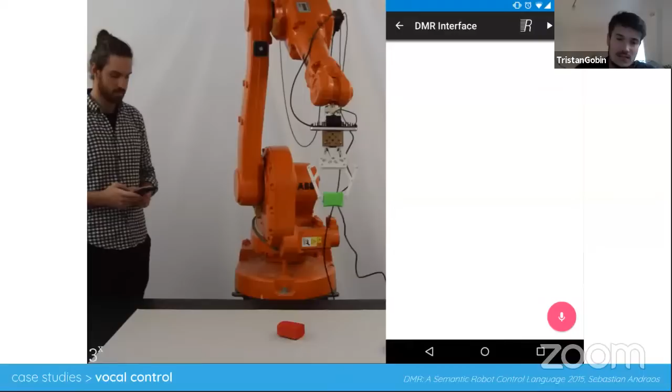We can use a lot of libraries that already exist to enhance the capacity of the robot. So it comes again to the question of the pipeline, how you link everything.

So it seems to be quite fun here, and actually it's development, but for us it's really the starting point of what we will be capable of doing on construction sites. So we are always experimenting on enhancing the tools that we have to allow us to reach this objective.

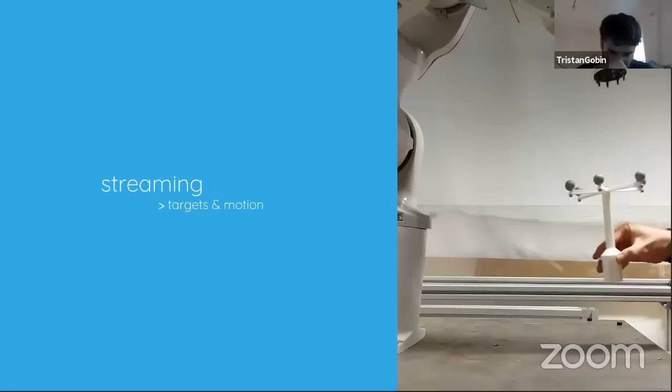So over the last 2 years, we have one achievement: the building of the first version of a platform. I don't have the right to show the second version of this platform, but we are working on it, and now it will be industrialized and commercialized.

It's a platform, it doesn't look like that anymore, it's a bit more industrial in design, and it will be used to operate on site, to drill, to make drilling operations, and especially when you have a lot of drilling, to make sure you can get the information of where you drilled to put it back into the BIM model.

So this whole approach is the last year of development. It's a continuing development, and I won't spend too much time on this video, it's just to give a glimpse of what we are developing.

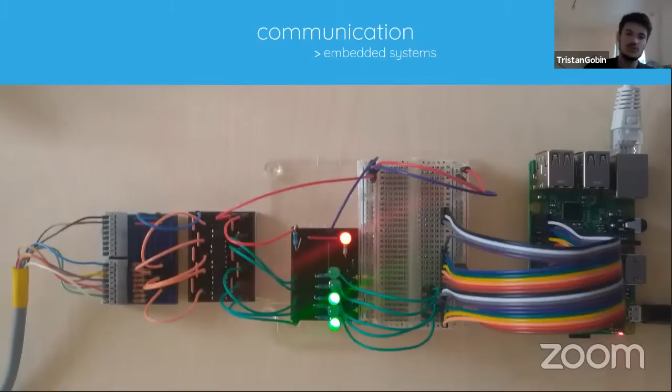And I will conclude with the last development we are doing, where we are trying to embed systems, moving from the environment of Grasshopper and Rhino, and move our framework onto Raspberry Pi and microchips, to allow us to control a lot of things: sensors, cameras, and so on, to make sure we can interact with a lot of things.

And for instance, we work on several various

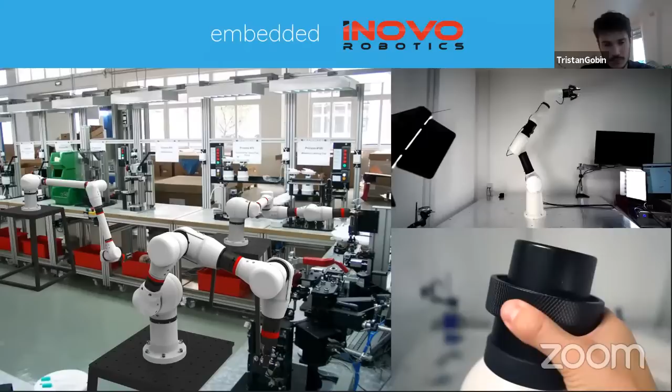Tristan, we have lost your voice, I guess. Hello. I think we have lost your voice. Do you hear me? No, we don't hear you. Maybe. Okay, you do hear me, but can you talk now? Because I guess we don't hear you. Or can someone else talk? Maybe there's something else, yeah, I cannot hear either. Okay, so you hear me, but not Tristan. Right? I think everybody can hear. It's just Tristan's microphone that might have some issue. Okay, maybe. Tristan, maybe your microphone has switched to another type of microphone. If you go to that little cursor, the icon of the mic, and change, select a microphone, maybe that will sort of activate your microphone back. Maybe you can restart. Under mute or unmute, there's a, if you can go there and click on that, it gives you a list. Hello.

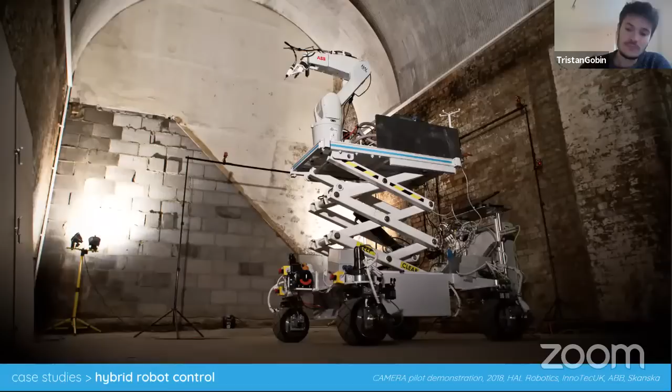So we are actually working on this kind of thing now. I won't go too much into detail in this video, it's just to show you the platform. But as you see, there are various sensors on it, and for the moment it's just for this kind of operation, but it will be used for others because you can swap tools on this robot, so you can have scanning operation, tooling, drilling, etc.

And so to conclude on that, what we try to do is go more into embedded systems, like embedding our framework into microcontrollers like Raspberry Pi, this kind of thing, or Arduino maybe. Not exactly the same, but we are aiming to develop more elements for small and embedded systems.

We try to also develop various approaches for different types of processes. We are going into welding, milling for wood, 3D printing, this kind of thing. And we try to work with the guys that actually know how to do that, because we are not specialists in welding, etc. So we try to develop as much as possible dedicated systems for specific work environments and specific people.

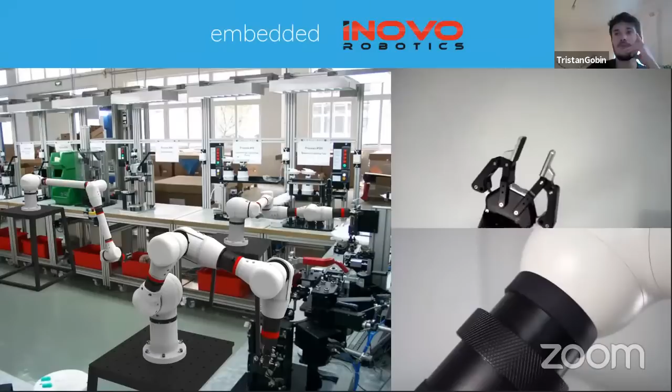And we also had the opportunity to embed our system in some robots, working on modular robotics. It's an interesting concept that allows you to swap some parts of the robots and modify the range and the motors also, so the weight and the capabilities to hold heavier or lighter tools, etc.

And then we try to work on augmented reality as well, again to make sure that we loop everything, that we can have a link in between everything. And yeah, that's the last development, I would say. And I will be done on that. Thank you.

Thank you very much, Tristan. Super interesting. It is really interesting to see how robotics has been focused on processes and workflows. And also, you touch upon a very important topic, which is assembly, which is how we can go beyond the production space of any specific robotic production setup.